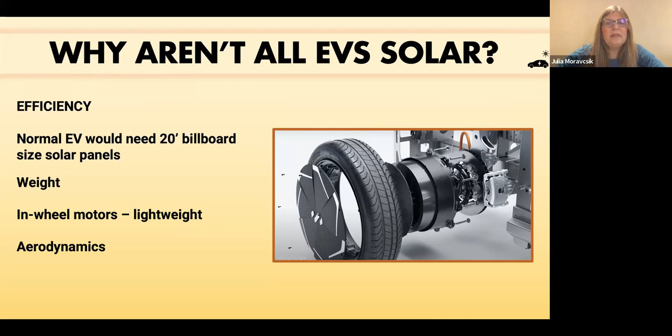And then all of them work really hard at aerodynamics. Aerodynamics accounts for a lot of energy efficiency in an EV, or even a normal gas car. I'll talk about some other ways of getting efficiency as well.

So what are some of the advantages of solar EVs? Well, the obvious one is carbon emissions. After manufacturing, which has embodied carbon emission costs, they're basically low to zero emissions. So all the carbon emissions, or almost all of them, come simply from the manufacturing, and then you're scot-free for the life of the car.

They can save approximately 1,400 pounds of carbon per year. And the electricity source doesn't matter - some states, like Washington, have very clean electricity, and some states have very dirty electricity. Colorado is not the worst, but not great. But if you're getting your power for transportation from the vehicle itself, it doesn't matter how dirty your electricity source is, because you're not using it most of the time.

Solar powered EVs are also useful for various unique populations. Since generally you don't have to plug them in, you don't have to be tied to an electrical outlet. Apartment dwellers are one example - this is a real problem with electric vehicles. If you have a garage, it's easy - you usually have a plug there, or you can put in a 240 outlet for faster charging. However, if you're in an apartment, you often have no place to charge at home unless your apartment owner is nice enough to put in outlets or chargers.

Here's another advantage: range at highway speed. There's a little secret about EVs—they actually have their best range at about 25 to 30 miles per hour, as opposed to gas cars, which have their best range at about 55 to 60 miles per hour. The problem is you're more concerned about range at highway speeds, because that's when you want to go on road trips. It's nice to have good range at 25 to 30 for a town car, but you don't want too much degradation at highway speeds, because then you have to stop and charge.

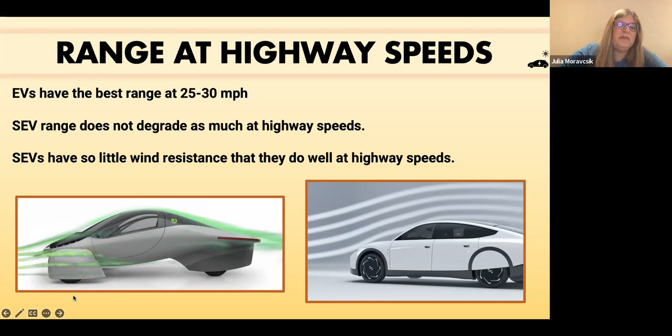So the solar EV's range does not degrade as much at highway speeds, because they work so hard at aerodynamics—they don't have as much wind resistance, and wind resistance is what slows vehicles or makes them less efficient at highway speeds. So they will actually do better on highways at fast speeds than regular EVs do.

Okay, so let's talk about the three solar EVs that I presented earlier. The first one is Aptera, a company based in San Diego. They have this vehicle—it looks pretty crazy, but all of that is basically for efficiency and aerodynamics.

It looks like they're trying to make some cool futuristic vehicle, but really what they did was start with software that measures coefficient of drag, which is the measure of aerodynamics, and they played with it until they found the ideal shape for aerodynamics, and then built their car around it. That's why it's this weird shape. It looks like a dolphin or a plane with no wings, because both dolphins and planes have to deal with aerodynamics. It's very inexpensive, even for a regular electric vehicle.

It starts at $25,900 and goes up. It has different ranges depending on the batteries, and the highest range is 1,000 miles, which is crazy. You could easily drive all day without having to stop and charge at a public charger. You can see in this map, this is basically what 1,000 miles looks like in the United States.

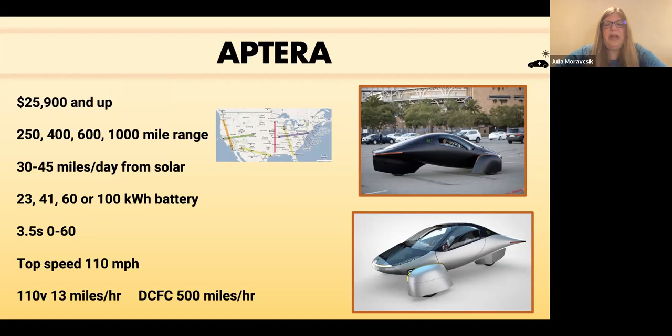Because it's so efficient, it actually charges very quickly. On a 110 volt outlet, the same outlet you plug your toaster into, it'll get 13 miles an hour. An average EV will get like 4 or 5 or so. So you don't really even have to have a 240 outlet installed in your garage like a lot of people do with EVs. You can just rely on the outlet that's probably already there in your garage. Then if you want to go on a road trip, the DC fast chargers on road trips will get you 500 miles per hour, so you can be there for half an hour and be fine.

Okay, so I'm going to play this video about the Aptera. Today, expecting sunny skies.

Okay, so a few things I want to say about the Aptera. I talked about the efficiency, so it's about 3 times as efficient as a Tesla Model 3, which is the most efficient EV out there. 0.13 coefficient of drag probably means nothing to you, but it's very aerodynamic. Here's a cool factoid: it's actually more aerodynamic than an F-150 mirror, so there will be less air molecules hitting your Aptera than hitting the side mirror on an F-150. It has 3 wheels, as you could tell from the video, and that produces less rolling resistance, so you actually get less friction, which is another reason why it's so efficient.

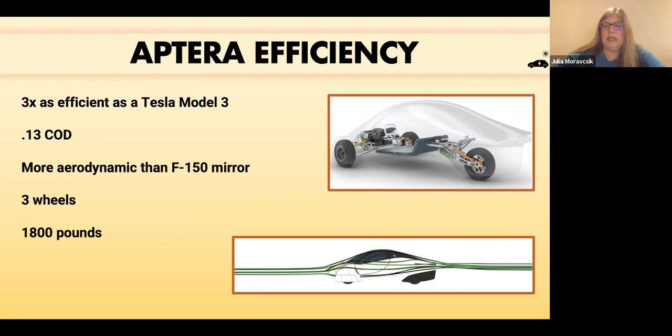However, I do want to say it is a full-size vehicle, so it does only seat 2 people. But it's as big as a regular car, with a hugely long trunk. It weighs 1,800 pounds, which is not much for a car—cars are usually twice that much at least, or 3 times as much. One of the reasons why it weighs so little is that it's not made out of steel or aluminum like most vehicles. It's made out of this resin-filled sandwich composite that race cars and boats are made out of. It's extremely hard.

They also have this thing called skin cooling. In order to cool the vehicle for you, like your air conditioning, they have a very efficient thing called skin cooling, where the body of the car has little pores that cool air will come out of.

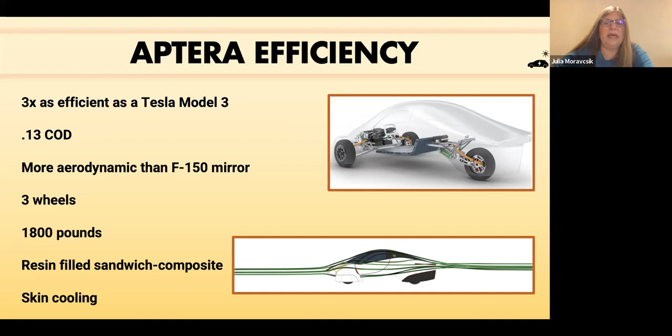Okay, so safety. A lot of times people look at the Aptera and it kind of doesn't look safe to them. So I want to talk a little bit about this.

It does have advanced driver assistance, so it will do lane keeping and things like this.

I told you about the exterior, and it is 7 times stronger than steel. So if you get into an accident with this vehicle, it's not going to impact inside the cab. You're not going to get crushed in the accident. But it still has crumple zones, which is something people are concerned about when there's a very strong material used for a car. Well, does it have crumple zones? It does. They built that into it.

Plus, this composite, unlike steel or aluminum, is flexible. So if you get in an accident, it will flex in and take the energy of the impact and then bounce out again.

Because it has 3 wheels, it's actually legally considered a motorcycle or an autocycle. So the safety standards are less for it because they're simply less for autocycles and motorcycles. However, Aptera said that instead of passing the 30 safety standards that a motorcycle has to pass, it will actually pass all 500 safety standards that the National Highway Traffic Safety Administration has for regular vehicles, regular cars.

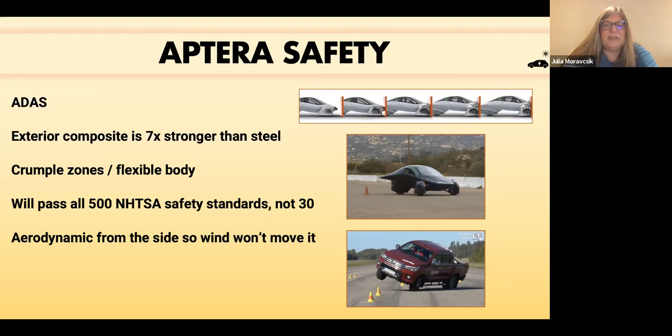Another thing people worry about is, if it weighs so little, what happens if there's a crosswind? Will it get blown off the road? It's actually aerodynamic from all sides, so the wind will simply slip over it just like it does from the front.

Another thing people are worried about sometimes is, with three wheels, will it tip over? There have been some notorious 3-wheeled vehicles in the past that would tip over fairly easily, but they had their single wheel in the front and the 2 wheels in the back, and that is not a very stable design. However, the Aptera is the opposite.

You can see on the pictures here, this is what's called a moose test. They put cones out so the vehicle has to move back and forth in an S shape or zigzag shape. It's called a moose test because the idea is you're driving along and there's suddenly a moose in the way and you have to go around it. SUVs and pickups are notorious for doing very badly on the moose test, but the Aptera has been tested and does extremely well, partly because the battery, like most EVs, is at the bottom of the car, which makes it very stable.

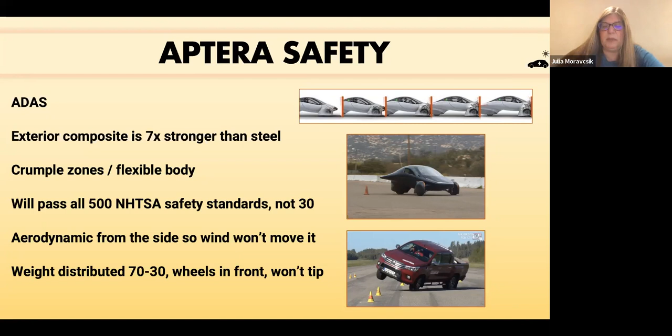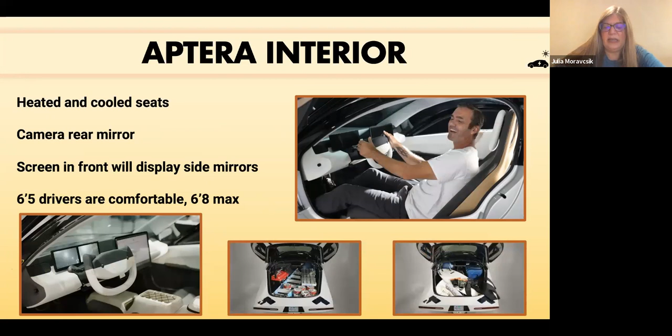Okay, so the interior has heated and cooled seats. It has a camera rear mirror, which you can do because it's technically a motorcycle. And the screen in the front will also display the side mirrors, so you've got great visibility, and there's enough room for tall people as well.

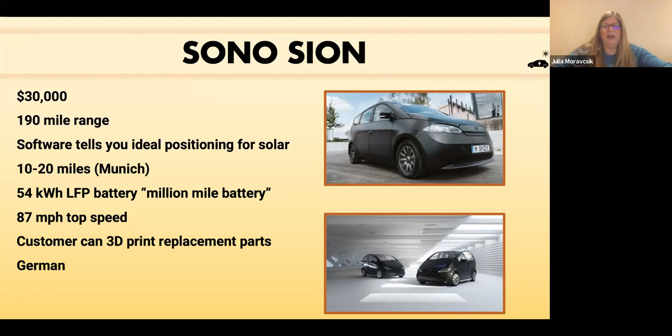Okay, so let's take a look at this one.

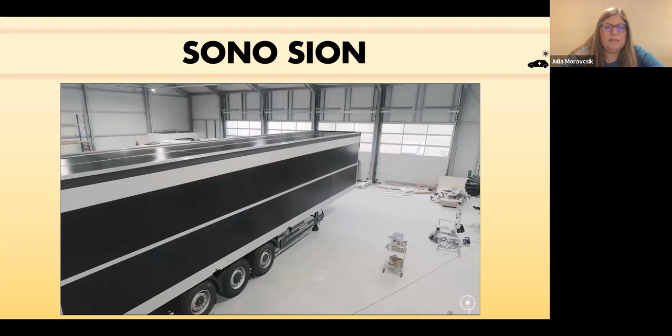Sono Motors is on a pioneering mission to accelerate the revolution of mobility by making every vehicle solar. Its disruptive solar technology has been developed to enable seamless integration into all types of vehicles to reduce the impact of CO2 emissions and pave the way for climate-friendly mobility. The Sion, our passion project, is where this all started - the first solar electric vehicle for the masses.

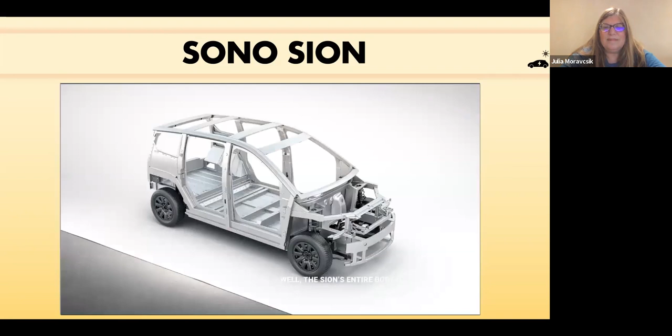So when we talk about a solar electric vehicle, or SEV, what exactly do we mean? Well, the Sion's entire body is covered in integrated solar cells that generate additional range for the car's 54 kilowatt-hour battery via the power of the sun, no matter if parked or driving. These monocrystalline silicon cells can generate an average of 112 kilometers of extra range per week. Our light and robust solar modules are able to produce energy even in cloudy conditions or in winter. This means the Sion can be fully self-sufficient on short trips and makes it the car that charges itself.

Thanks to the additional range generated by the sun, the average commuter in German metropolitan areas needs to charge an average of 4 times less compared to other conventional electric vehicles with the same battery and consumption. You have multiple options when charging the Sion: at any public charging station in Europe, at your home via your regular power socket, or even from another Sion. But that's another story.

I'm sure the burning question everyone has after seeing that video is, what is that green stuff? So they have this cool thing where they actually put moss in the car as part of the air filtration. This moss sort of sits there as a little pet in your car, and it will help filter the air. It doesn't do it completely, but it helps filter the air, and it also provides humidity. When you get your car maintained, they can just take out that moss and put in more moss.